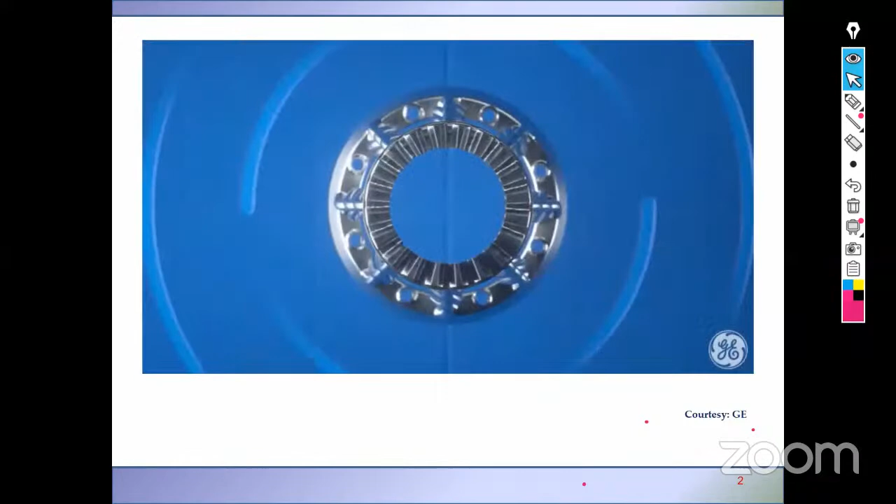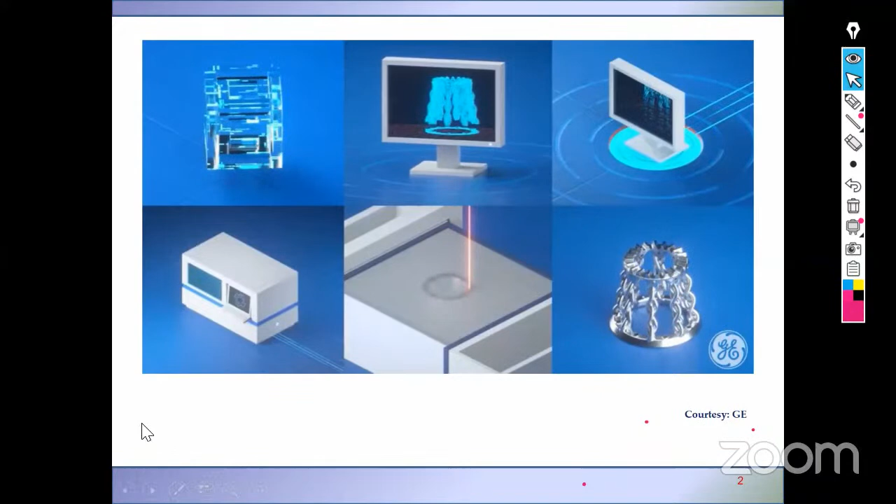So this is the simple video which explains the process of making additive manufactured parts. Basically, the definition of the additive manufacturing process is the process of creating an object by building the material layer by layer, using different techniques for building layer by layer, or by melting the material and depositing it on the platform where the product is going to be manufactured over a period of time. So that is what additive manufacturing is all about.

The process is opposite to subtractive manufacturing. In subtractive manufacturing, we have the cast product, and those products are machined using special machinery, and then we make the product with whatever dimensions we require through the machining process.

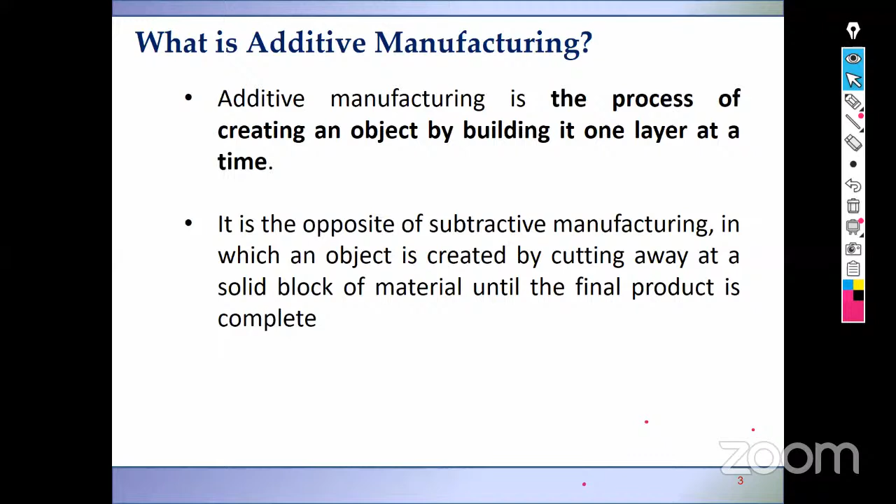And you see the process compared: subtractive manufacturing and additive manufacturing. In subtractive manufacturing, we have the bulk material, which may be available from different processes, maybe a casting process or a rolling process. We have the bulk raw material, and then this will be machined through special machines to get the required product. So this is the 3D objects.

For example, if this object is to be manufactured, we use special machines, machine it, and finally get the 3D product. You see the wastage. Through the subtractive conventional manufacturing process, you see the wastage of the material.

Compared with that, in the additive manufacturing process the raw material may be in powder form, wire form, or solid form. Using those raw materials and an additive manufacturing technique, you can manufacture the same 3D component, and the wastage is minimal. That is the advantage of the additive manufacturing process.

Even though complex manufacturing processes exist for metals, we can manufacture complex parts through additive manufacturing without any complex difficulties, whereas with other processing techniques it can be difficult to get complex shapes. So this is the advantage of using additive manufacturing: the wastage is minimized, you save material, and you can minimize the production cost. So next.

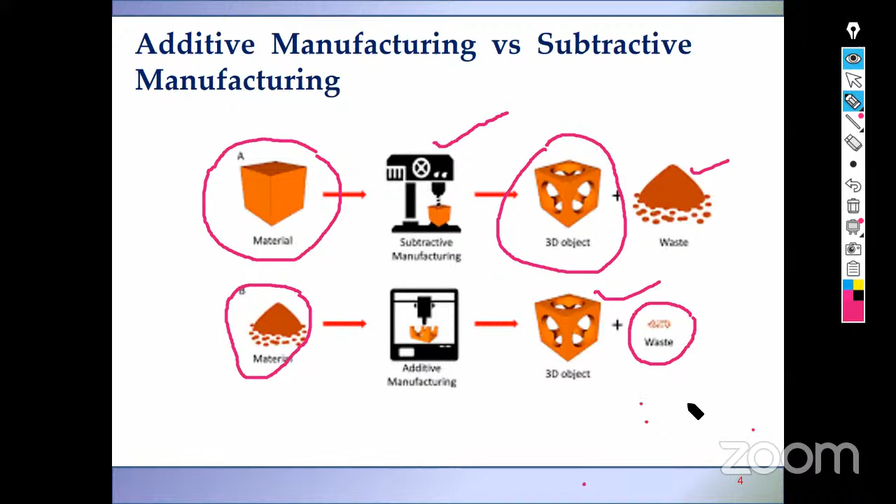This is a milestone chart of the additive manufacturing technique, starting from 1984, when the technique was patented. Over time, we came across different applications like biomaterials. Sorry. So this is 1996. Then we have the first biomaterial for human tissue regeneration, and the first 3D printed blood vessels. These are some of the important milestones of the additive manufacturing process.

Now we use 5D printing also. The difference between 3D printing and 5D printing is that in 3D printing you get a three-dimensional object by depositing the material layer by layer, in the extruded direction, to get the additive manufacturing parts.

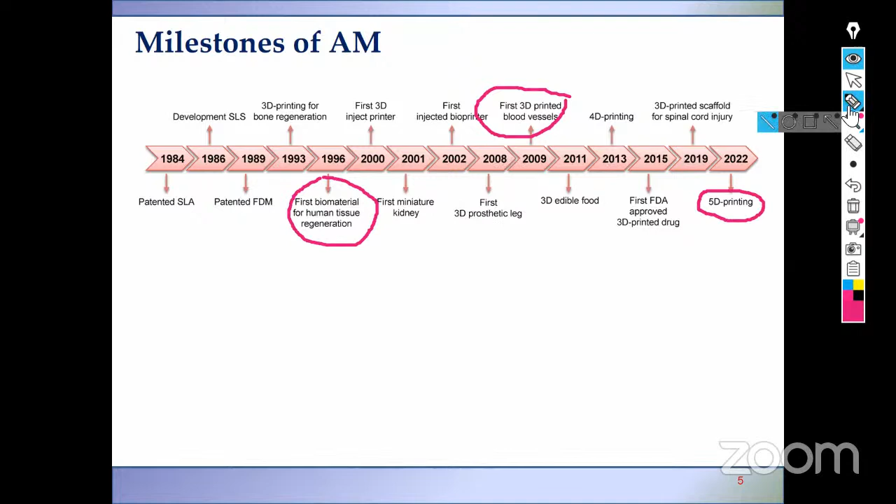Whereas in 5D printing, in addition to the X, Y, and Z direction movements, we also have rotation about X and Y for manufacturing curved additive manufactured parts, which give more strength compared with the three-dimensional printer. So starting from 1984 till now, this is the milestone of 3D manufactured components.

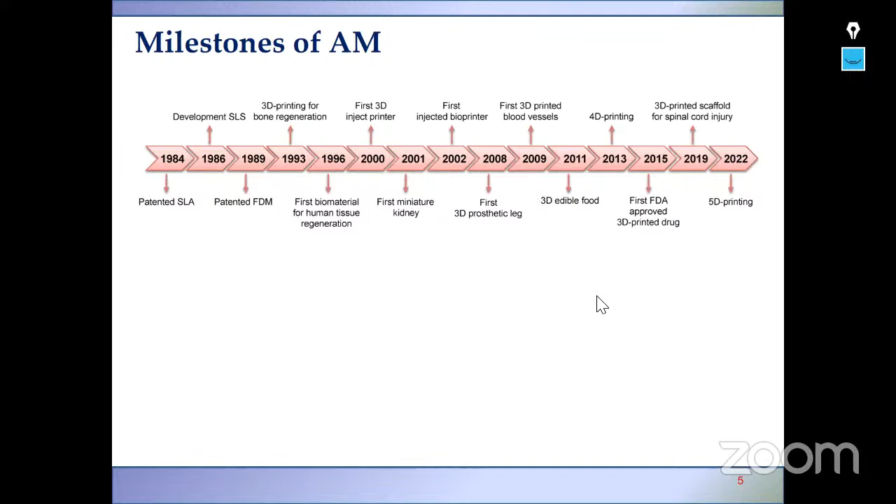And this is the classification of additive manufacturing, based on the different processes. Based on the methodology, we can categorize the different processes like material extrusion, lamination, binder jetting, powder bed fusion, and energy deposition. Based on the type of base material used for the additive manufacturing parts, it can be solid, powder, or liquid form. So with this you have different methodologies to fabricate additive manufacturing parts.

And based on the media used for processing, this may be a laser beam used for melting the materials and depositing them on the platform, or ultraviolet rays passed through liquid resins to manufacture the parts, and thermal means can also be used for fabricating additive manufacturing parts.

In the liquid method, we have different types like stereolithography, direct light processing, and polyjet printing. In solid-based additive manufacturing there is laminated object manufacturing, fused deposition modeling, wire and arc additive manufacturing, and electron beam freeform fabrication. So these are the classifications of additive manufacturing methods, based on the methodology, the base material, and the media used for processing the parts.

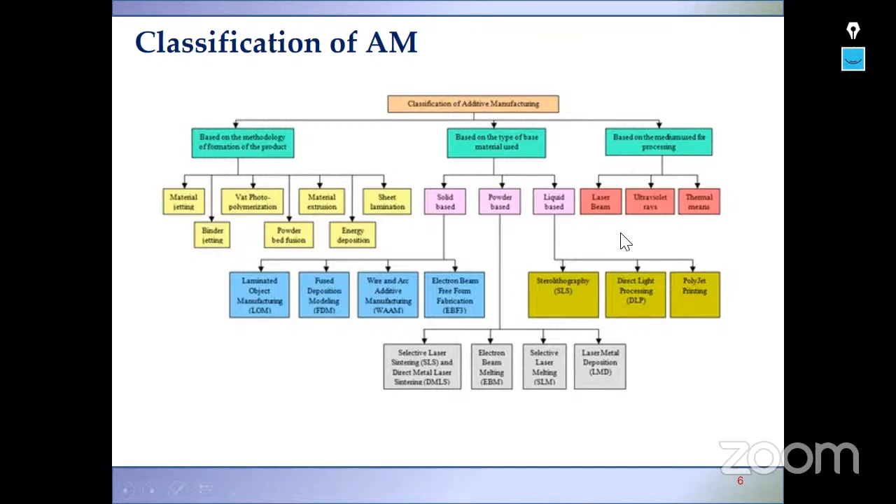And from the start, researchers can do a geometrical design and a material design. For the geometrical design, you design the component using designing software. Any software can be used, for example Autodesk Fusion 360 or Creo for designing the part model. After that, you have to do the material design.

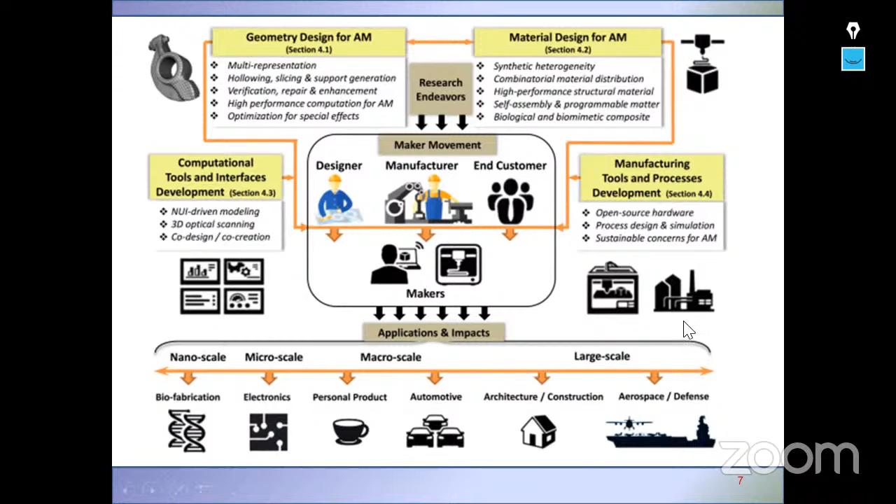And so these are the different kinds of materials which are used for manufacturing parts, and this is what we are going to see in the forthcoming slides. And we use materials like ceramics, metals, and polymeric materials.

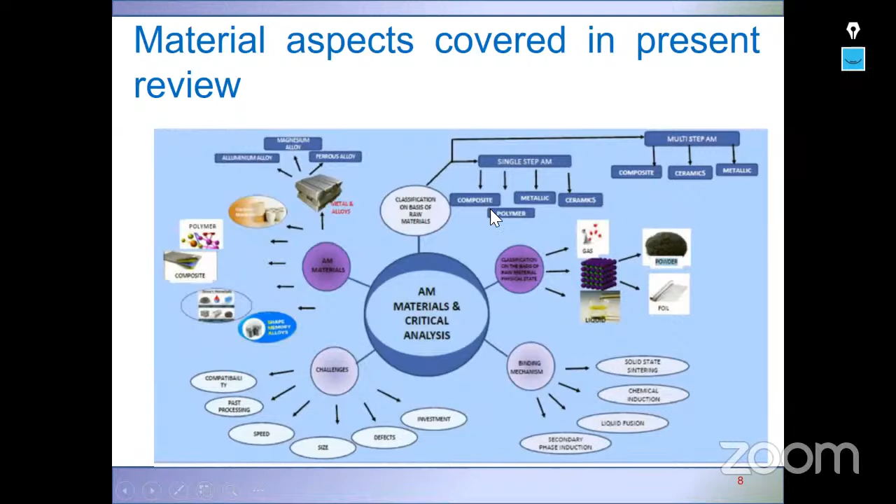And then we use different techniques with these raw materials to make the additive manufacturing parts. The process may be a single step additive manufacturing method, or it may be a multi-step additive manufacturing method, which is used for composite, ceramic, and metallic materials. And single step we can use for composite, metallic materials, ceramics, and polymer also, based on the applications of the additive manufacturing parts.

And in the additive manufacturing process we have different categories: vat photopolymerization, powder bed fusion, material extrusion, material jetting, binder jetting, sheet lamination, and directed energy deposition. These are all the process-based methods of additive manufacturing. Because today's topic is materials challenges and future aspects, I have listed only the process-based methods here.

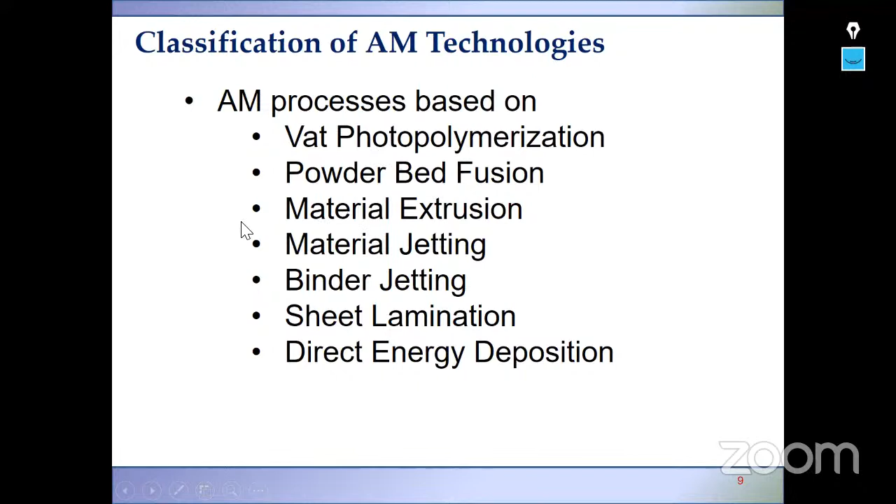Apart from that, you have various techniques. In the classification of the additive manufacturing process, we classify based on the material, based on the methodology, and so on, to get the different types of additive manufacturing methods. Here we present the process-based additive manufacturing techniques. The first one is vat photopolymerization.

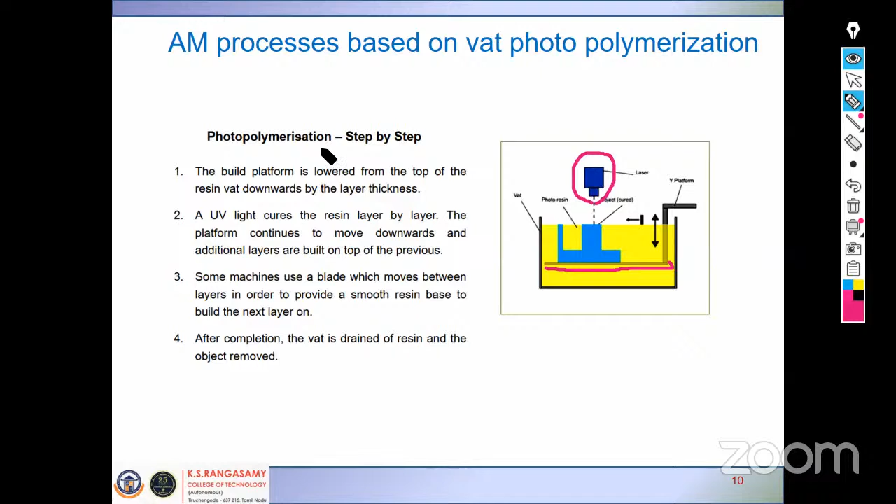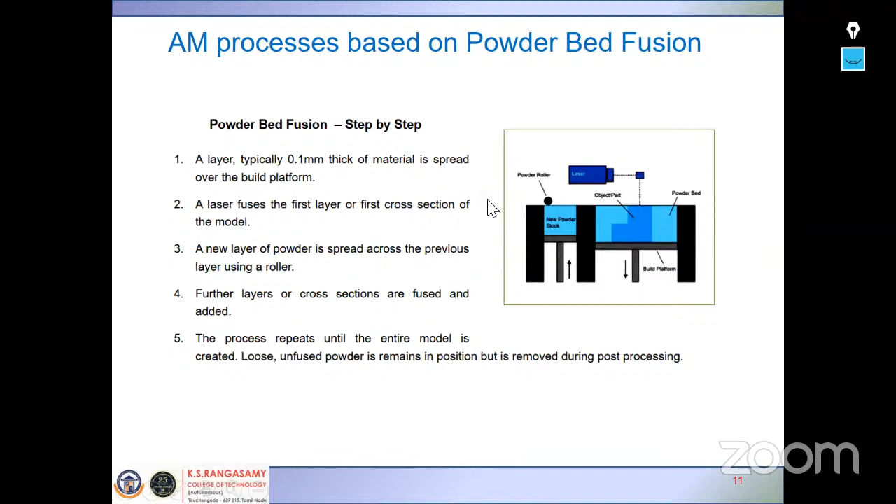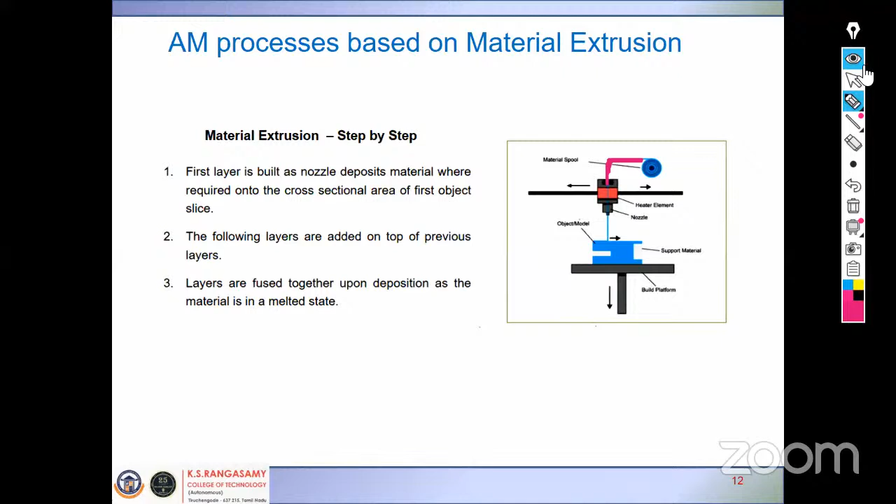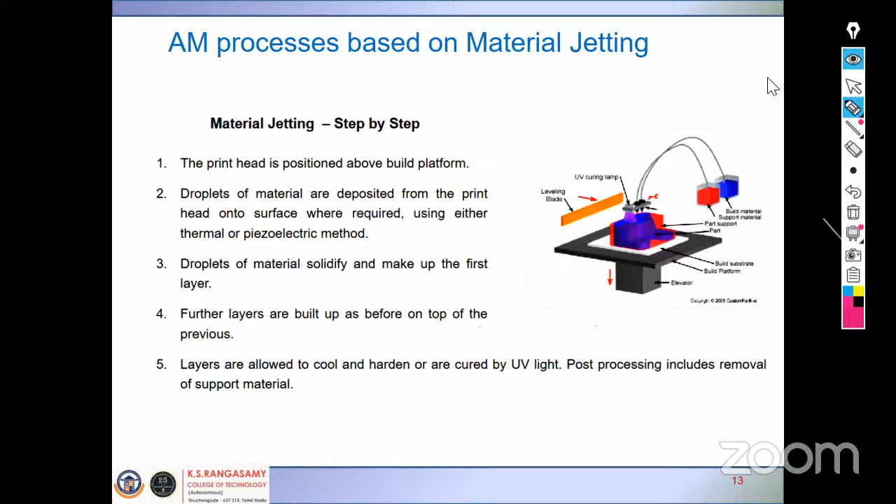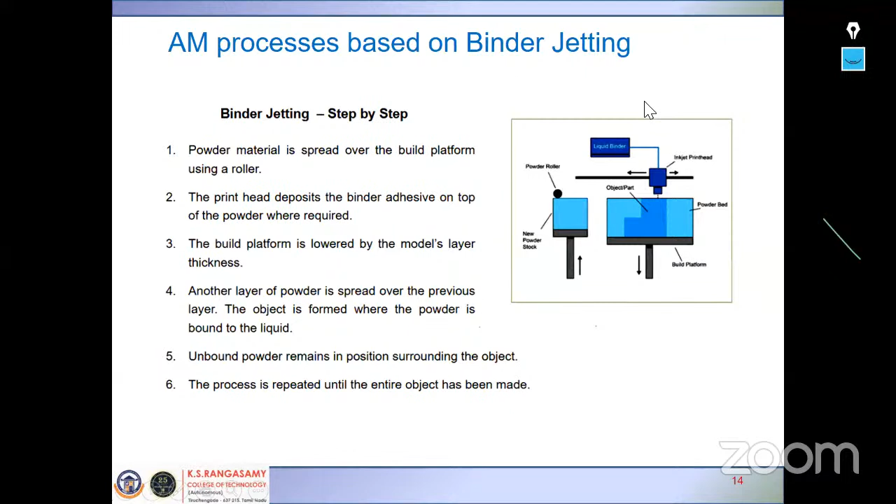The next one is binder jetting. Here the powder is filled into the chamber, and we inject the binding material through nozzles. The powder completely fills the build chamber, and based on the CAD model, we receive slicing codes through slicing software to control the movement of the injector head. It moves based on the shape of the product being built in the build environment, and the binder material is injected through the powder material. The binding material immerses and impregnates within the powder, binding the powder particles together, and finally you get the 3D printed object. Wherever there's an uncovered portion, the powder remains in powder form only. After removing it from the build platform, we remove the excess powder and get the final additive manufacturing product through binder jetting. That is the principle of the binder jetting technique.

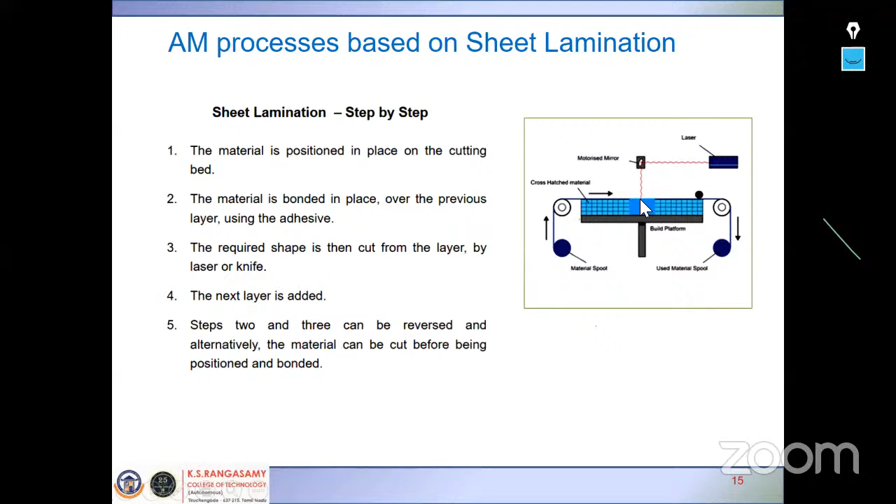Okay, so those sheets will be placed on the build platform. Then the bonding material is placed on the surface, and then again the next sheet of laminated sheet will be placed over the other layer, and the process will continue in the build direction. Finally you will get the required shape of the model through additive manufacturing, using raw materials in the form of sheets.

Next, the direct energy deposition technique. Here you have the electron beam and the material feed wire. What happens is the material feed wire, in wire form, is fed onto the build platform, and the electron beam melts the material and deposits it on the build platform.

The movement is based on the CAD model created using software, which is converted through slicing software. Based on the thickness chosen through the slicing software, we can get the final product using the direct energy deposition method, since we are directly melting the material and depositing it on the build platform to get the final product.

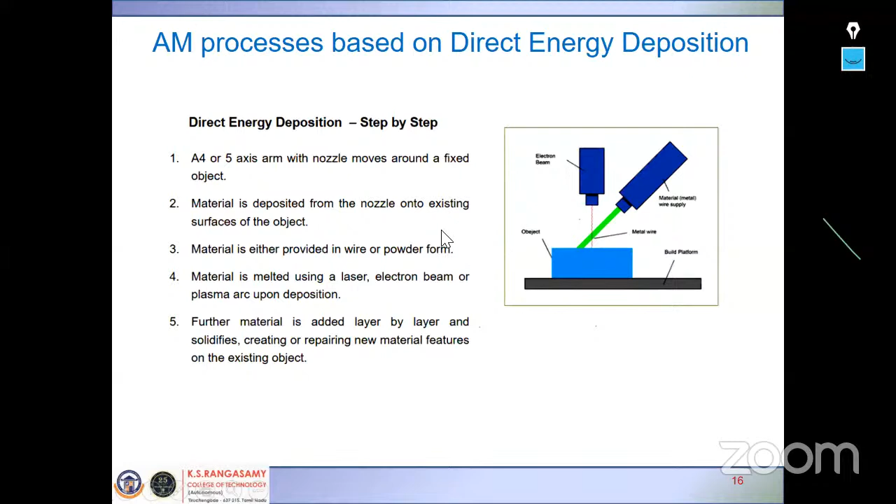So these are all the different methods and techniques used based on the process for manufacturing additive manufacturing parts. Here we are using raw materials - what kind of raw materials we use, and what processing techniques we use, depends on the application.

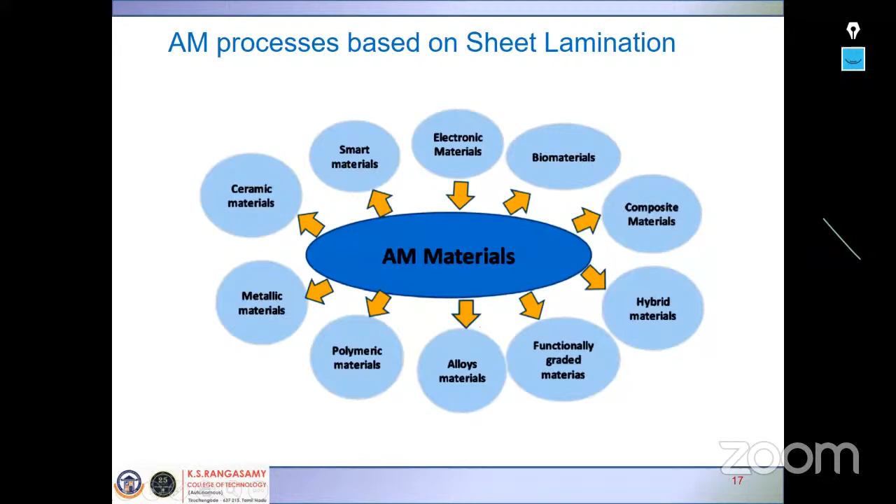Some of the materials used for additive manufacturing parts - we have covered almost all materials like ceramic category, smart materials, electronic materials, biomaterials, composite materials, hybrid materials, functionally graded materials, alloy materials, polymeric materials, and metallic materials. These are all the materials used for additive manufacturing processes to get the final product.

So here I have mentioned three categories: one is polymeric materials, another is metal, composite, ceramic based materials, and then liquid, powdered, wire, or sheet - these kinds of feedstock which are used for that.

Here, polymeric material, paper laminate, and waxes - these are the initial raw materials during the original phase of additive manufacturing techniques. This is the raw material used for the additive manufacturing 3D printing machine.

And plastics also, we have used another group of material to make plastic materials, and metal composites, ceramics also we can use for the 3D printer. So this is now with the latest advancement in usage of materials.

Because these metal composite ceramics have a very high manufacturing cost, and also the manufacturing time is high, because the pre-processing and post-processing of 3D printing materials involves complexity, particularly the post-processing techniques for metal 3D printing is more.

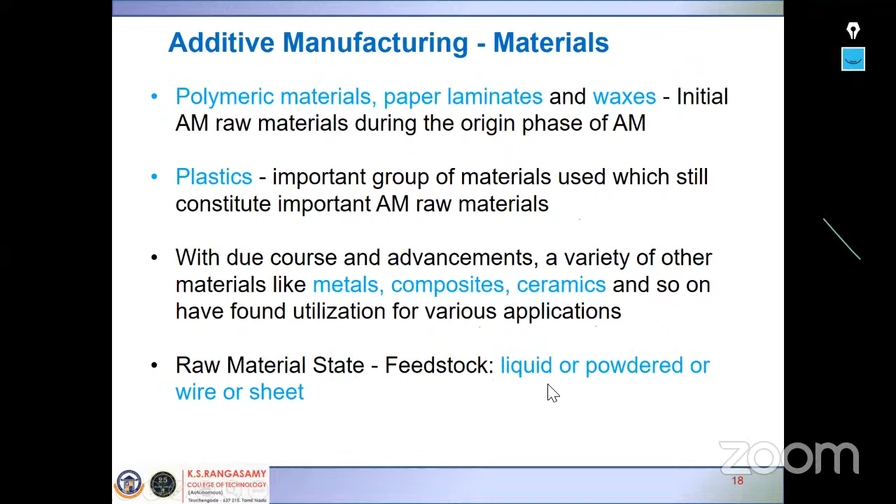Liquid and powder form are also used for metals, and we can print additive manufacturing parts. Now for the different techniques, here I have mentioned a few.

One is stereolithography. The concept used here is curing of liquid using resins, as we talked about initially. Using ultraviolet rays, light rays, we can cure the liquid resins. Wherever the light rays expose the liquid resins, it will be solidified and make the solid part, which comes as an additive manufacturing part.

The laminated object manufacturing technique fabricates parts by joining sheet feedstock. You place the sheet on the build platform, use something like a binding material, then put another sheet over the adhesive, and use it as a laminated object manufacturing technique. Then you get the additive manufacturing parts.

Then SLS, selective laser sintering, where the powder is melted to get the 3D printed material. The laser beam may be used for melting the powder material, and it is deposited on the build platform layer by layer. Then we get the additive manufacturing parts.

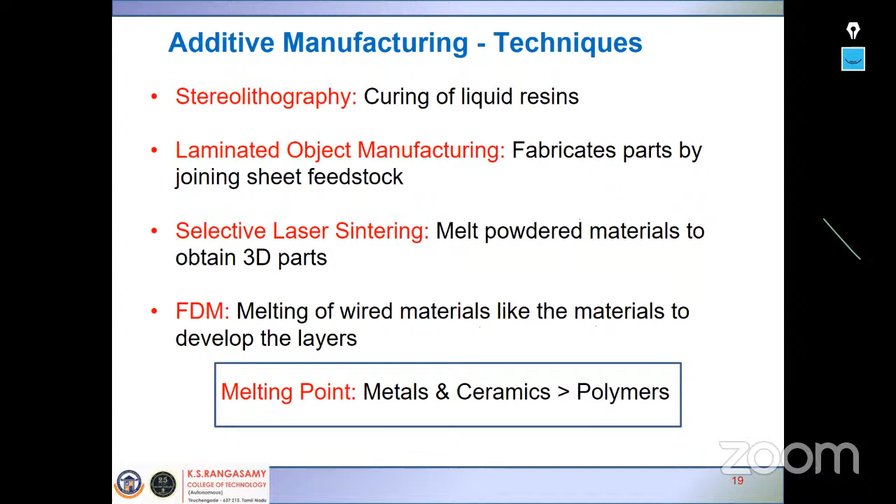Next is the fused deposition modelling, where you melt the wired material and deposit it on the build environment, developing it layer by layer. Then you get the additive manufacturing parts. So what are the materials used for the 3D printed form? One is polymers.

These polymers are widely used wherever you see a 3D printer, definitely ABS material is there, in wire form, fed into the melting nozzle, and then the polymeric material is melted and injected through the nozzle, deposited layer by layer on the build platform. Then you can get the final products.

The fabrication of plastics, polymeric graded material, and polymeric matrix composites can be fabricated. This is based on lesser melting and curing temperatures, which enhance chemical stability as well as the tendency to flow smoothly both in molten and softened form. It's a common method for processing polymeric materials.

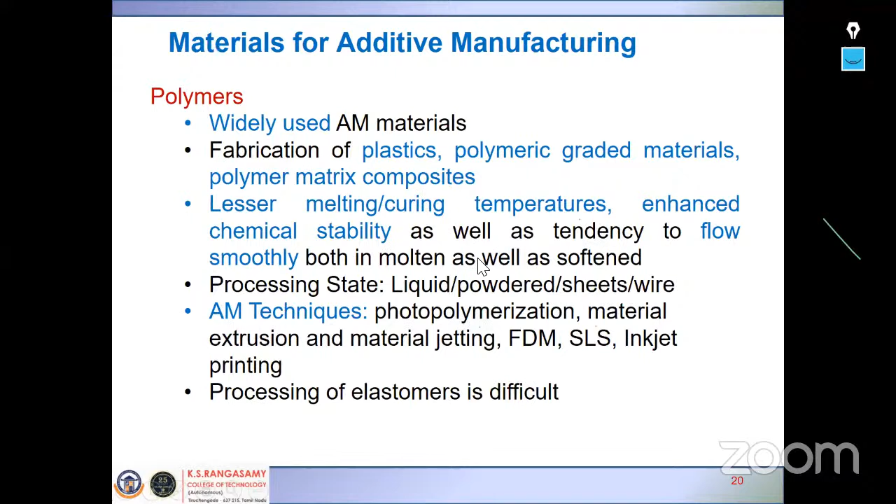So these are all the polymers and monomers used in additive manufacturing. These are all the materials. It may be in liquid form, polymer powder form, polymer filament form, or polymer films form. These are the different forms of raw material fed into the 3D printing machine. The fusion technique may be optical, chemical, mechanical, or thermal, which is used for melting these polymeric materials, which are then deposited layer by layer on the build platform.

And then the printing technology. These are the various printing technologies like multi-jet or PolyJet, SLS, binder jetting, or FDM. So based on the application and the component we manufacture through the additive manufacturing process, we can print the component. So based on the material, the fusion technique, and the printing technology, we can categorize it.

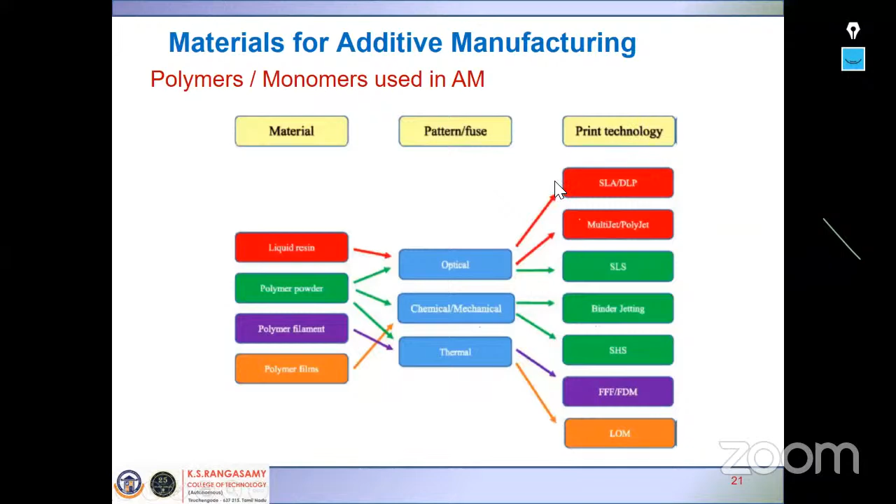And the next one is metals. With metal, it is flexible to fabricate simple components, and we can also manufacture complex metal components. Applications for metal 3D printed components include automotive, defense, aerospace, construction, and the electronics industry. Still, there is a higher cost involved in printing metal 3D printed components, so we have to analyze the appropriate technology to minimize the component cost. We have to work on all that.

Many researchers are working in different directions to get good processing techniques and lower production cost. That research is going on, and I am also working on 3D printed components. I received a 3D printed component of Inconel 718, and I want to work on material characterization: the mechanical behavior, the wear rate, and the corrosive behavior of the 3D printed Inconel 718. It has just started. Later, if time permits, I can present the results of the mechanical properties, corrosive behavior, and wear behavior of the Inconel 718.

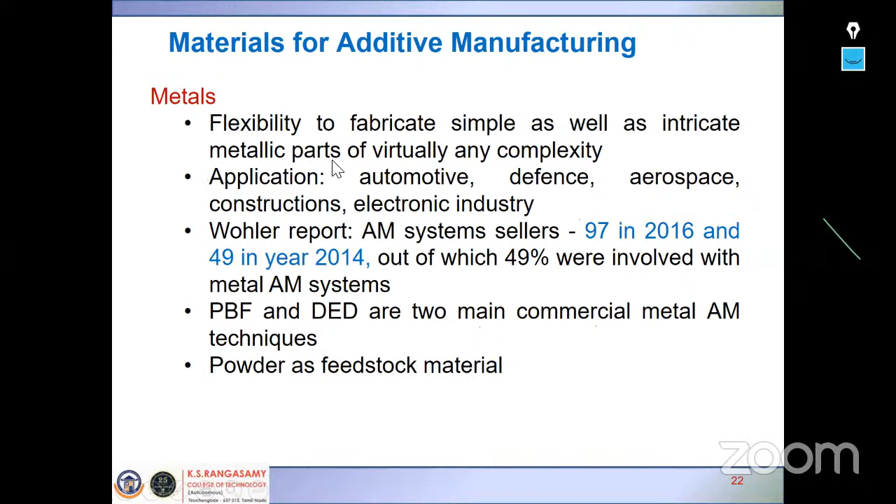There are two commercial metal additive manufacturing techniques, powder bed fusion and directed energy deposition, used for metal 3D printing. Here we use the feedstock raw material in powder form, and we can get the metal 3D printed component. So these are the materials for the additive manufacturing process, particularly metallic materials, in the form of powder, wire, or other feedstock material.

In powder form, the powder bed fusion technique can be used, or we can use the directed energy deposition technique. The powder bed fusion technique is based on either a laser based method or an electron beam method; these are the two techniques used for melting the metal powder. For directed energy deposition, we use the laser based technique only. So these are the different methods used for the powder technique.

Whether you have the metal wires, then we can use an arc-based method, electron beam method or laser beam method to melt the wire metal and deposit it on the build platform layer by layer. So here you give the energy input, and then the wire-form material is melted and deposited on the build platform. So this is the technique we have to use.

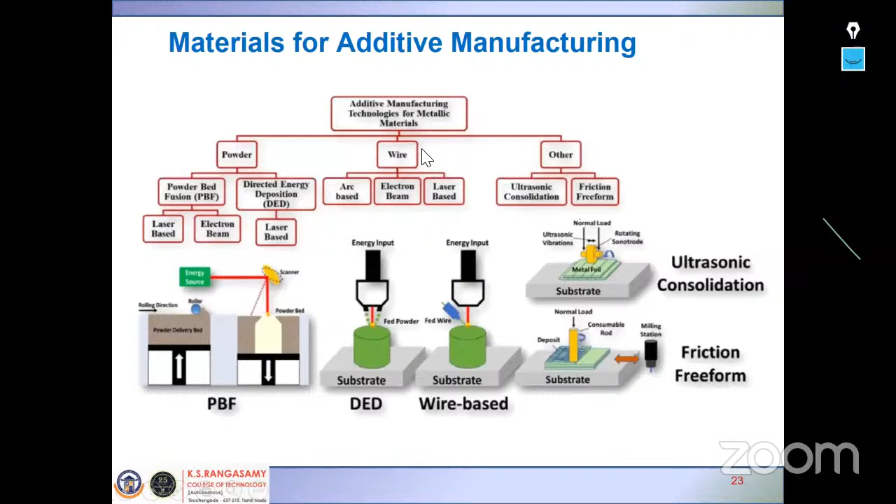The other techniques are ultrasonic consolidation and friction freeform, and friction stir welding, and the welding processes. So like that, we can use them for metallic materials also for 3D printed components. So these are all the classifications of the technologies for metallic materials. The different metallic materials I have presented here.

One is the ferrous alloys. The techniques used for ferrous alloys are PBF laser and DED laser, that is, the powder bed fusion method and the directed energy deposition method. The materials used for ferrous alloys are the grades of austenitic stainless steel, including 304, 316, 304L, 316L, AISI, and heat treatments are generally applied on additive manufacturing produced steels to achieve the desirable properties, and we can produce fine-grained steel components compared to conventional manufacturing techniques using ferrous alloy material.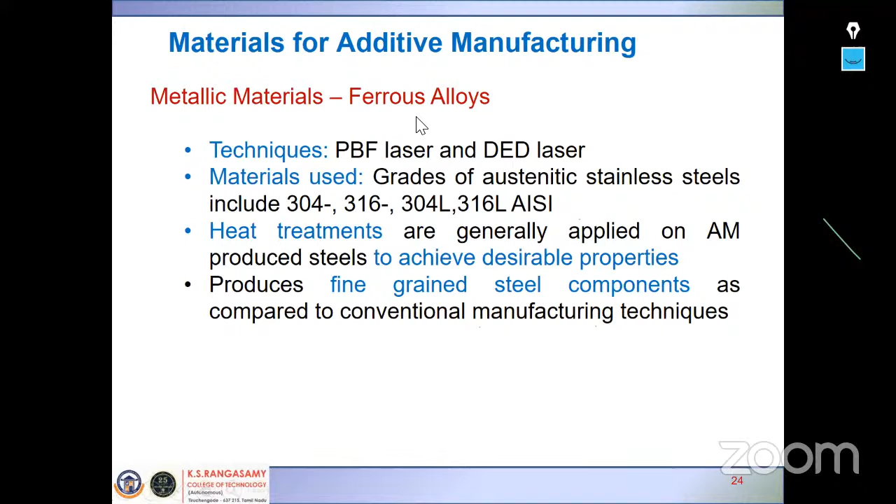And the titanium alloys: again, the powder bed fusion method and the direct energy deposition method are used for fabricating titanium-based 3D printed material. The most commonly used material is Ti6Al4V, and it is compatible with biomedical applications. All the implants can be fabricated using this titanium alloy based material, and it is commonly used in biomedical applications due to its compatibility with the tissues.

The properties are high strength to weight ratio, good fracture and fatigue resistance, and good corrosion resistance and formability. Because of these properties, titanium alloys are used for biomedical and other applications also. The other applications are aerospace and automobile sectors. Titanium alloys have two forms: one is the alpha phase, another one is the beta phase.

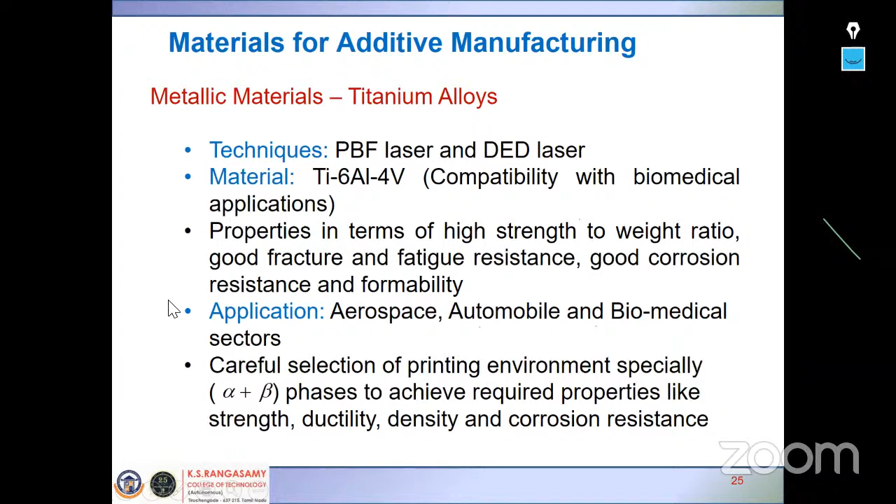The alpha phase has good strength and low ductility, whereas the beta form of titanium alloys has higher ductility. So you have to carefully select the material and the printing environment for combining the two phases. Based on the application, we have to mix the two phases, identify suitable tailored material properties, and then 3D print it using 3D printing technology. You have to carefully select the printing environment also, the temperature and other factors, to achieve the required properties like strength, corrosion resistance, ductility and porosity.

So next one is the aluminum alloys. The techniques used for 3D printing are the powder bed fusion laser method and the direct energy deposition method. Arc welding based additive manufacturing processes are also used for aluminum alloys. For properties, you have a good strength to weight ratio and good corrosion resistance, but poor weldability and low laser absorption. These are the disadvantages in using aluminum alloys.

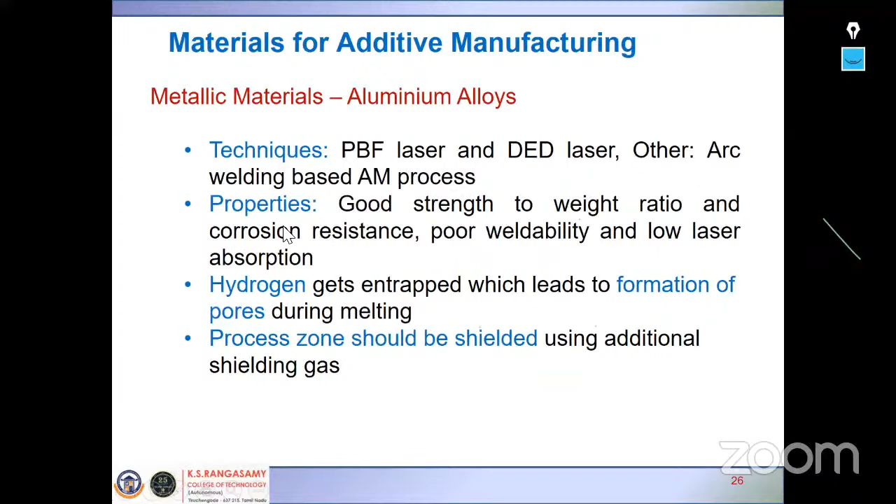When you use aluminum alloys, you have to carefully control the environment. When you melt aluminum alloys in a normal environment, hydrogen gets entrapped, which leads to the formation of pores during the melting process. So you have to use a specially designed, closed environment. The process zone should be shielded using additional shielding gases, and then you can avoid the entrapment of hydrogen during the melting process. Once pores are formed due to hydrogen entrapment, the product's strength can be weakened. So we have to be very careful when processing aluminum alloys using 3D printing.

So next one is the ceramic materials, and the suitable and economical method is the powder bed fusion method. Ceramics have a higher melting point compared with polymers and metals, which is a major challenge for processing ceramic materials using the 3D printer. Materials used for the additive manufacturing method are calcium phosphate and silicon carbide, silica.

The application is in the aerospace and automobile sectors, in the development of engine and propulsion components, and also electronic components and microchips. Okay, so the most advantages are in the field of tissue engineering and biomaterials because of the material property, and these ceramic materials are used for scaffold designs.

It is made up of ceramics for the bone and the teeth. It is an integral part of tissue engineering since the process is relatively fast in comparison to traditional manufacturing processes like casting and sintering. Okay.

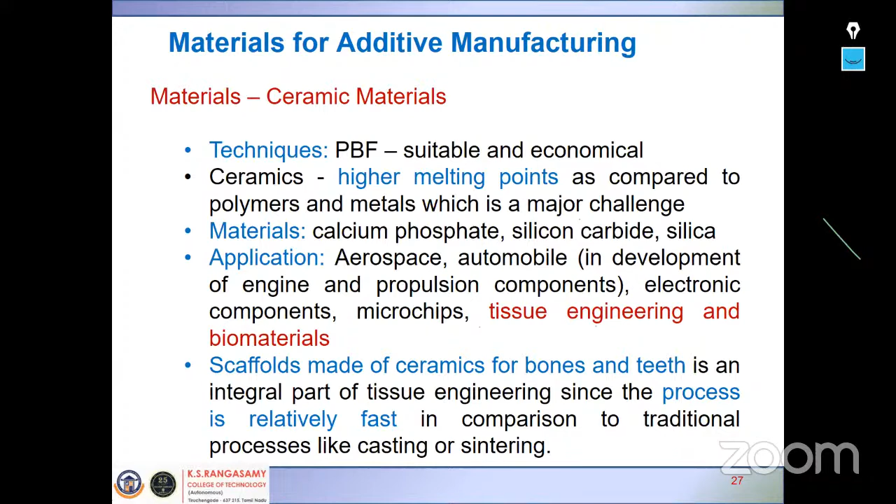So finally we come to the challenges and the future prospects, and what challenges we can face for additive manufacturing materials. One is the compatibility of the raw materials with the additive manufacturing processes. That is very important. When you use multi-materials, the compatibility also we have to verify. And when you use a biomedical application, the material has to be compatible with the tissues, so that is also very important.

The next challenge is the surface finish. Getting the surface finish using additive manufacturing technology is another challenge. And the dimensional accuracy, another part of the challenges in 3D printing, and the anisotropic behavior. When you fabricate 3D printed parts, the build environment should be maintained in such a way to get a good surface finish, based on the nozzle dimensions and the speed. There are different parameters involved to control the dimensional accuracy, so that is also very important.

When you go for good dimensional accuracy, the cost of the machine is also very high. So that is another part of the challenges. With all the parameters involved in 3D printed parts, we have to face the challenges, and based on technological advancements, maybe in future we can overcome all those challenges to fabricate 3D printed parts.

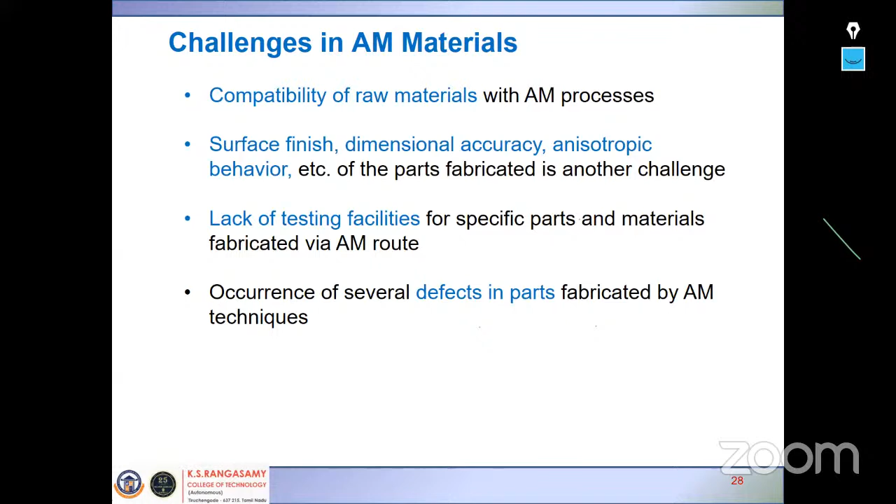The lack of testing facilities. Once we 3D print, we lack testing facilities for the specific parts and materials fabricated through the additive manufacturing route. And the occurrence of several defects in the parts. When you fabricate 3D printed parts, you have defects in the parts, so this is another challenge. I will show some of the challenges and defects in additive manufactured parts.

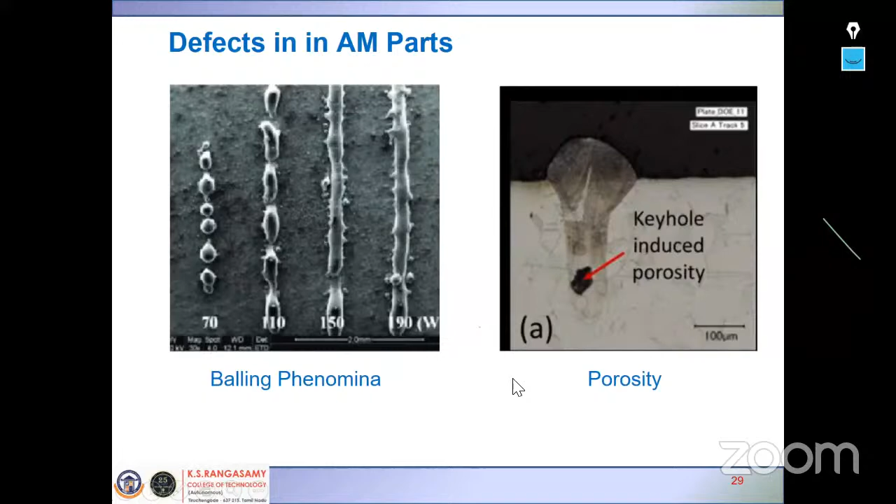The balling phenomena. The under layer may not be properly wetted, and then you will face balling on the surface. Porosity is another defect in the part, and cracks which form during 3D printing. This is the build direction. You see hot cracks present in the material. This is because of the thermal gradient. Due to the thermal gradient, residual stresses are present in the material, and that will lead to cracks in the 3D printed material.

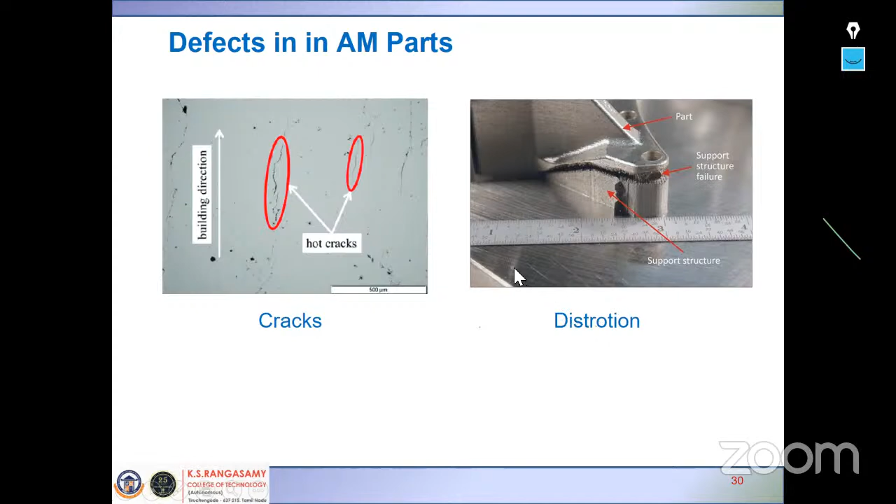The distortion is another defect due to volume shrinkage, which takes place in 3D printed components. The other challenges are limitations on size. The build platform is another challenge. Even with a very big machine, you have something like 1,000 mm by 1,000 mm by 1,000 mm. I visited CIPET, and the machine is around 5 crore, and the build environment is like 900 by 900 by 900.

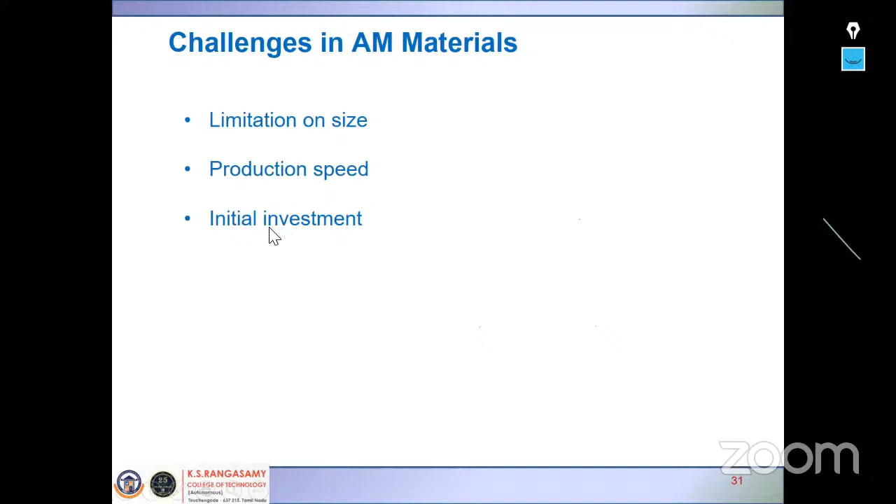So size is another limitation, and the production speed is also a challenge, and the initial investment on the material and on the machine, which has a high cost. These parameters are also challenges in additive manufacturing materials.

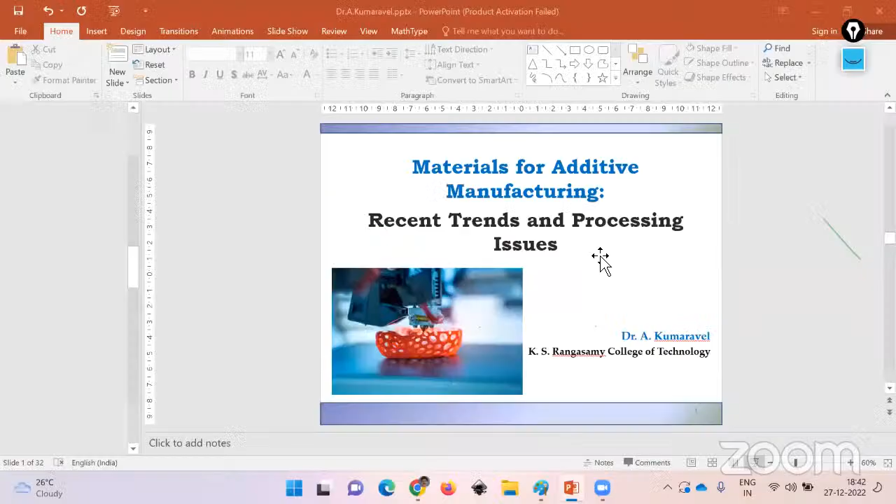Sir, Kumaravel sir. Yes, sir. We totally enjoyed your lecture program, sir, full of information. And today we understood what 3D, 4D, and 5D printing are, and the chronological development, everything, sir.

I've got only one question, sir. You told in one slide that two materials are being used for additive manufacturing. That is 3D printing. How is the homogeneity getting maintained, sir? It is coming in three lines and fed to the additive manufacturing, no? In between, it is getting mixed, sir, that raw material.

Yeah, combining two materials in the multi-jet 3D printer itself is a very complex process, because very limited machines are available. Once you choose the materials to combine, you have to see parameters like the melting point and other parameters being closer to the other material. So that is how you have to choose the combination of those materials.

If you choose one material as titanium and another as aluminum, it will not work out, sir, because you have two different materials, and there will be shrinkage, and thermal expansion is also involved. Because of all these parameters, you will not get the full product. So when you combine two materials, some parameters should be very close to the other material. Like that you have to choose. Otherwise, the problem will come.

Yes, sir. Your answer is very clear, sir. Thank you, sir. Yes, sir.